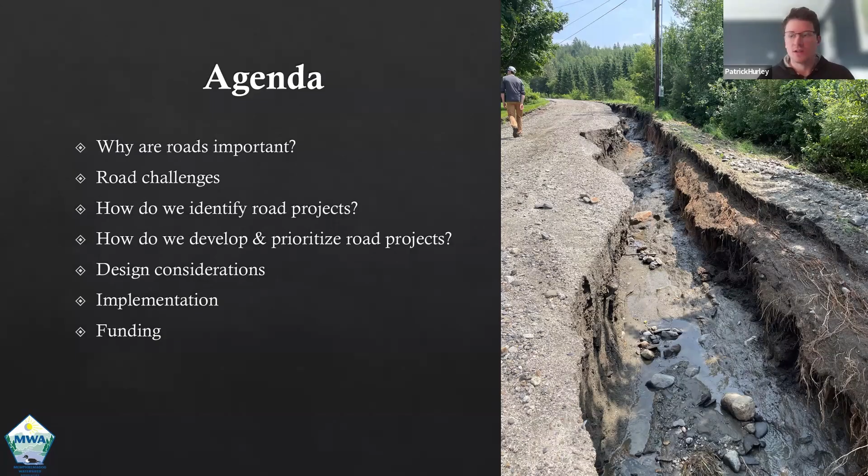We're going to discuss how we've traditionally developed and prioritized road projects one over another, and some of the co-benefits or reasons why certain projects kind of float to the top as opposed to some that kind of sink to the bottom. We'll talk about some design considerations that we try to keep in mind when we're working to fix some road issues and protect and preserve the lake water quality. We'll show some examples of road implementation projects that we've done, and then we can discuss some of the emerging funding opportunities in the state of Vermont for addressing problematic roads and trying to get improvements implemented on the ground.

You all know why we love roads, right? We need access to our houses, we need access to our camps, our properties. It's critical for emergency access. When roads wash out and people are isolated from emergency services, that's a big problem. We also love to recreate, as much as many of us love to get as far away from society as possible when we enjoy our leisure, whether we're boating or hiking around. It's pretty hard to get to our favorite spots without roads.

We also definitely need them to maintain connectivity in our communities, with our businesses, our economy, and roads are the lifeline of our economic success. Without transportation and road networks, we really wouldn't be able to do anything. So while we have road networks that may not be as compatible with ecological needs as we'd like to see, we can't really do without them. So we got to work with them, right? So that's why we're all here. And we prioritize this work because of how important it is for those kind of critical values of our society that we just went over.

And it can be a challenge to work in road settings around waterways, streams, lake shores, wetlands. But we're really committed to doing it because there's so many benefits that come from having functional road networks that are not exacerbating our water quality stressors or our habitat stressors.

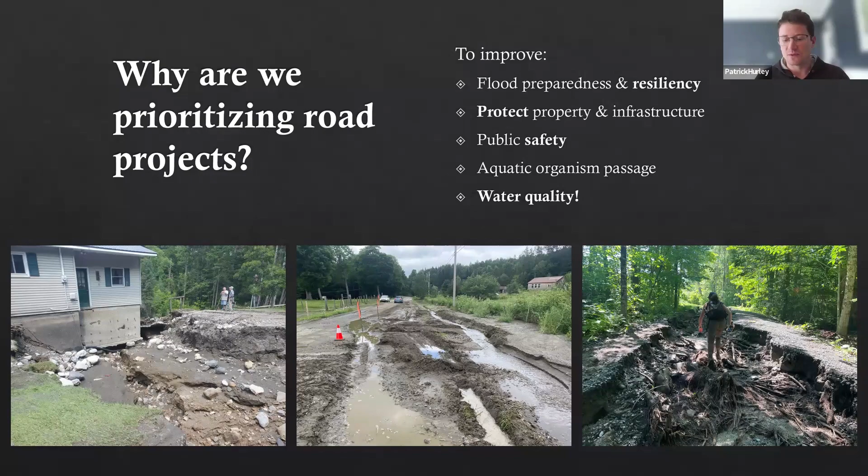And then one of the major things that we try to address is just how costly road disasters can be. Some of these photos are from Morgan, Vermont, that really took a brutal hit in the last couple summers from our floods. And for instance, Toad Pond Road, we lost about a mile of that road. And you can see here, it washed away all the way down to bedrock. We lost probably 40 culverts on that road because they all clogged up with material.

And then the water coming down from the mountain couldn't pass through the road culvert, so then it jumped down the ditch. And then it runs down the ditch for about a mile and it takes everything out with it. So this is costing the town upwards of $700,000 to repair, and it will be way more than $1 million to upgrade in terms of improving the flood resiliency.

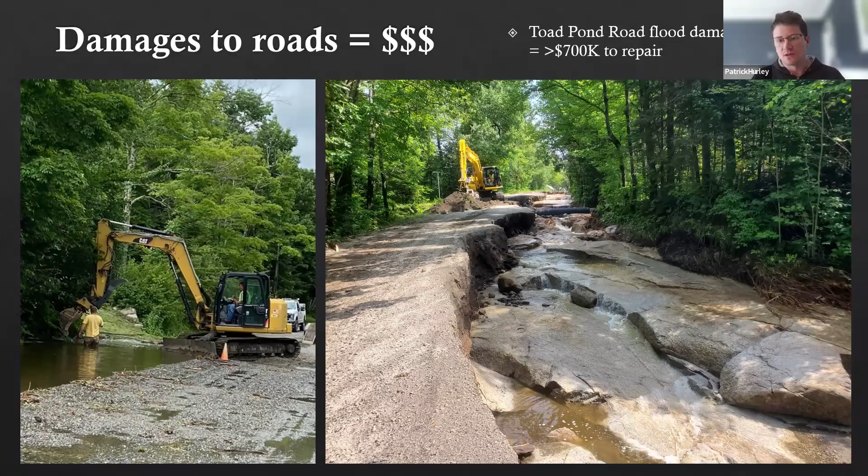And these are small communities. Morgan has less than 1,000 taxpayers in its community. And so being able to support those improvements on a limited tax base is a big challenge. And so having some clean water dollars and other funding sources that can help get us to the finish line on some of these improvement projects is really important.

As I like to say, the proof is in the pudding. This is from our Echo Seymour Lake Watershed Action Plan. So for those of you who aren't familiar, we have worked with DEC and lake associations and our partners at the conservation districts, both Orleans and Essex County, to do these watershed assessments that look at road networks, stream networks, lake shores, and we often extend our work to agricultural parcels and working forest lands to try to identify opportunities to improve water quality or protect water quality, improve habitat.

And then one of our objectives is to kind of break down what sector the excess phosphorus loading that makes its way into these target lakes, where is that coming from? Is it coming from the farms? Is it coming from the streams? Is it coming from the road networks or wetlands or lakeshore projects or forestry projects?

And so we have an ability to use DEC tools like the interim phosphorus calculator, which helps us determine, okay, if this project, if this gully, for instance, is washing away at this rate, what can we estimate the phosphorus loading from this singular water quality issue? How much phosphorus is this generating?

Or for instance, a road network, if it's not performing as it should, if it doesn't have the best management practices that it should, what is the phosphorus loading, the contribution from that road to the overall phosphorus budget? So by estimating the excess loading from all of these different projects that we identify on the ground, we can kind of parse out, okay, of the total excess load getting to Echo and Seymour Lake, 102 kilograms, for instance, per year are coming from the roads versus only 13 from wetlands and 9 from agriculture and 40 from floodplains. And so in this instance, the road networks were a major source, the primary source of excess phosphorus loading.

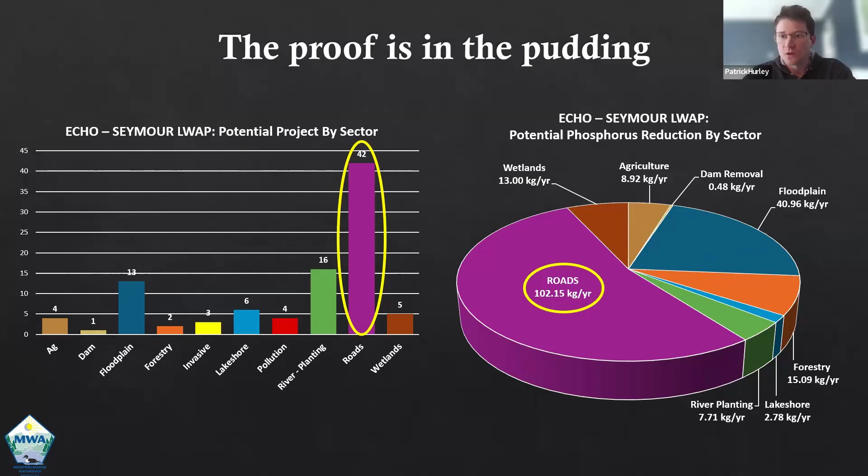Now, this is a very coarse approach, right? This is not an analytical or an empirical study. We're not doing a total maximum daily load analysis or anything like that, but it allows us to compare apples to apples, or apples to oranges, right? And so there's a common denominator. What's the phosphorus loading? And so in Echo and Seymour, it was a lot of road problems. And a lot of it because the roads are old and steep and they're on really heavy soils and they wash away regularly. So that was a big takeaway. It's like we need to work on our roads, both public and private.

But in the forest sector, there was actually tons and tons of trails, right? Skid trails and logging roads. And so those might be classified as a different sector, but really at the heart of the matter is the same problem. It's a dirt road. It's a gravel road. And so that's a targeted area that might mislead one into thinking it's strictly the cutting of the trees that is an issue, but ultimately it's actually the access routes into the forest harvest areas that can pose a problem. Do we have a question, Patrick, Deborah?

There's a question in the chat. How did you quantify the sectors and how could you parse the data into sectors? Sure. So we refer to them as work sectors, and the state has kind of differentiated the work sectors. So if we identify a water quality issue on the landscape, we try to boil it down to, is this an inadequate riparian buffer? Is it a stormwater management issue? Is it a loss of wetlands issue? Is the stream and the floodplain out of sync? Are they disconnected? Are they eroding? Are the stream banks falling in? Is it a road crossing or a road erosion or a road ditch problem, or is it a forest trail and road problem? And so when we're identifying these problems or opportunities on the landscape, we have to essentially classify them into one of those bins.

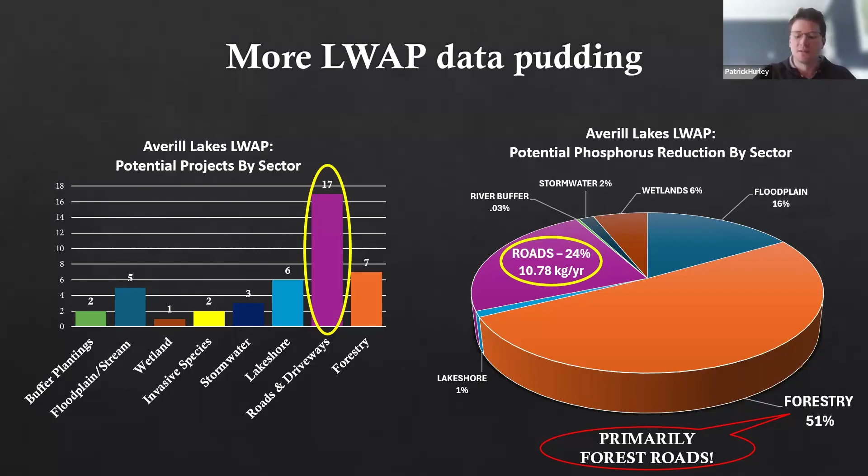There's a lot of challenges with road projects, right? So some of it dates all the way back to the settlement period. A lot of these roads were not built to be roads. They were horse logging trails. They were goat paths. They were a skid trail for collecting ice harvest in the wintertime. They might be a sugaring trail.

And then they were built, improved to become a cart path. And then they were improved to be a one-lane road once the Model T got around. And now it's expected to pass two semi-tractor trailers going 50 miles an hour right by each other. That's a serious reality that we need to consider. A lot of these roads were not sited. They were just built. They were not designed. They were just built. And it's been Band-Aid after Band-Aid after Band-Aid for 100 or 200 years.

So it's a big realization that some roads are rotten to the core because they weren't built properly or they weren't built ideally. And that's a really expensive challenge to fix. We don't like talking about eminent domain in our country, but oftentimes we do consider, should this road just be moved? And it's rarely ever done because it's not feasible or cost effective. But there are opportunities where that should be explored because sometimes roads are just in the wrong place.

Roads bisect or run tangent to virtually every regulatory jurisdiction you can imagine. Historic resources, archaeological resources, wetlands, streams, lake shores, utilities, steep slopes, confined areas, alluvial fans. There's often challenges with, as I mentioned, the road construction. Is the road crowned like it should be, or is it a sunken road because over 100 years all the materials washed away, or they cut through a hillside and they didn't do a cut slope, fill slope kind of construction. They just trenched right through it.

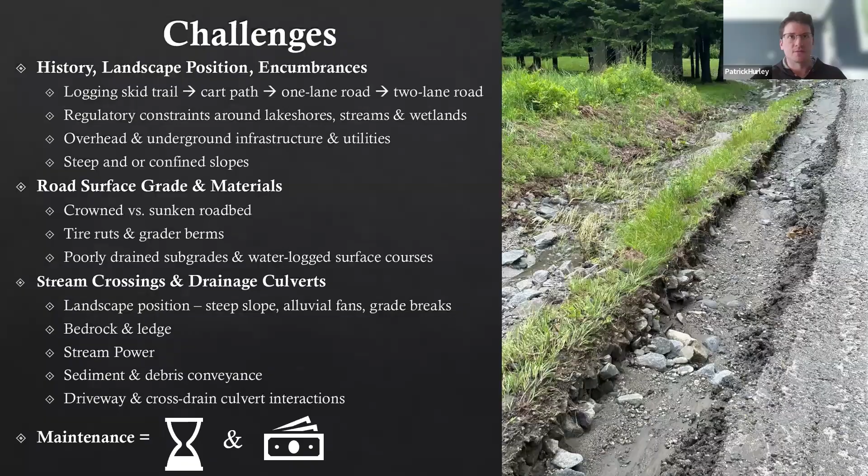So I'm just going to show you some carnage, some pictures that get everybody thinking a little bit. This is just a driveway in Morgan, and what happened here was not a problem with the road. What happened here was the stream coming down from the mountain decided it didn't have enough space for this flood, and it jumped its bank and it came screaming down through this private property, and it took out a private road. Actually, this is a public road, I should say. It really serves only two private residences. But you can just see what it did. That's a 5-foot gully right through this yard.

And just notice that on either side of the pictures, the grassed yards look almost unscathed. Just a little bit of vegetation and root matter really makes a difference between those unconsolidated roadbed materials washing away, right? And so where we can anticipate washouts on roads or vulnerabilities, we try to address them. But this one was almost completely unexpected because it wasn't even crossing a stream. This is 300 feet from a stream, and the stream just kind of went squirrely in the middle of a flood event.

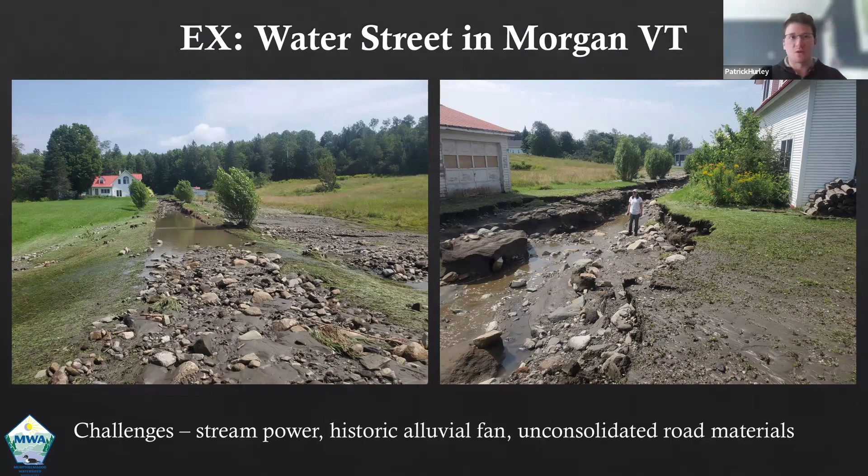Another shot from Morgan. This is because of an undersized culvert, or the culvert got clogged. It jumps the road. Not only is it bringing debris with it during the flood, but it's then creating more by washing out the road. And you got to wonder where all this material goes. It goes right down to the lake. That first picture I showed you on the cover slide, that's from the Seymour Fishing Access area in Morgan. I think I owe Dennis Fortin a shout out for taking that photo.

That's a giant delta sandbar that formed immediately after the floods, and you can bet that 90% of that material is roadbed material, and it all came down from our road network in town. And the state spent several $100,000 dredging out that access area. And if we don't improve our structures and improve our road networks, we're going to have to do that again if we plan to continue using that boat ramp.

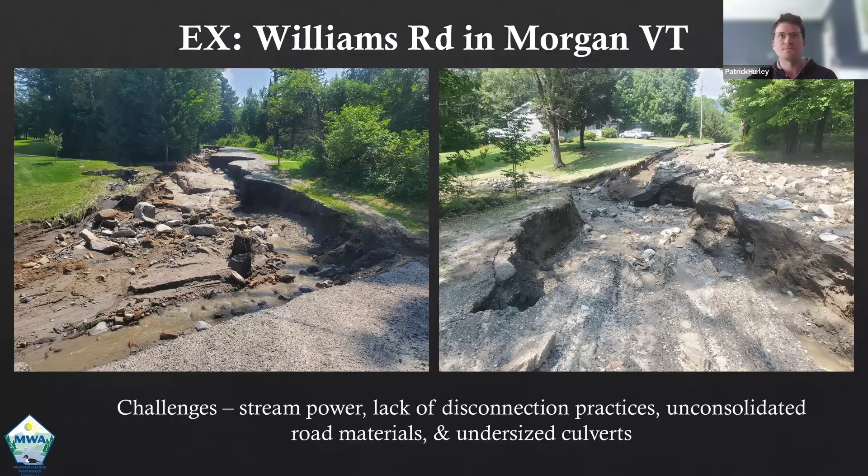Just another couple of pictures of what an undersized culvert can lead to. Not only can it get clogged because of debris like sticks, wood, boulders and whatnot, but stream crossings and culverts, you got to think of them as a plumbing issue. If you put a reducer on a pipe, like you stick your thumb on the end of a garden hose, it's constricting the flow. It's going to accelerate the velocity of the water coming out the other end. It's going to pressurize it. That is erosive power, that's elevated erosion potential.

When we put an undersized pipe in a stream crossing, it's functionally making a reducer and it's creating erosive power on the other side. So what we try to do in our projects is upsize those structures so that they can pass large floods without having those detrimental impacts.

And then there's the less dramatic issues with roads, which is just driveways and ditches where we see them getting overwhelmed or clogged or the flows are jumping out. We're just losing road material. And where does it go? Pretty much everywhere - in your front yard, in your backyard, down the stream, into the lake. And it's not ideal. It's expensive.

It ruins fish spawning habitat. It impairs water quality. It makes that lovely lakeshore access that you have turn into a quagmire of silt and muck when you'd rather be walking on a nice firm gravel bed. And all of this has compounding effects that really devalue our waters and our road networks and just cost the taxpayer an awful lot of money.

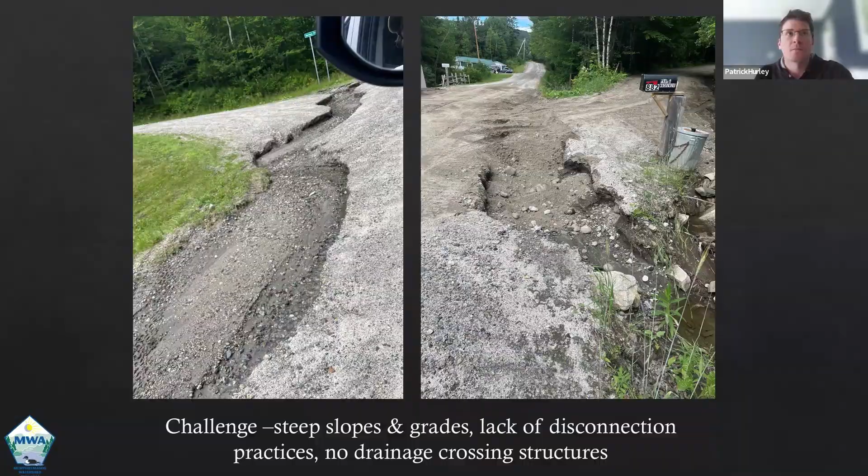Again, culverts - they are often the biggest challenge because they're difficult to maintain. You don't think about your culvert until there's a problem, and oftentimes they get buried so quickly that you don't even know where it is anymore. So improving these, whether it's a driveway culvert or a public road culvert or a stream crossing on a major road, really is some of the lowest hanging fruit that we start with our assessments and continue developing projects around these stream crossings because they are really the bottleneck.

And then once it gets down a lake, you have large gravel bars, these debris flows, and oftentimes they revegetate on their own and they can provide new habitat in ways that you might not suspect. But these are also incredibly vulnerable to invasive species infestations.

When you have bare substrate like this after a flood, and that flood carried knotweed or Phragmites downstream, whether it's roots or seeds or plant stalks, this is wildfire for them. They love bare earth, they love no competition. If they can get a foothold in this new gravel bar or in this new silt pocket, they will take advantage of it faster than anything else.

So we've been really sounding the alarm to our lake associations: where you see these deltas forming, where you see these new gravel bars at the mouth of your lake, keep an eye on them. If you start seeing Phragmites or knotweed pop up, go after it hard and heavy. Take it out right away. Don't let it get a hold, because the longer you wait, the more impossible it is to eradicate, and they love to spread and creep.

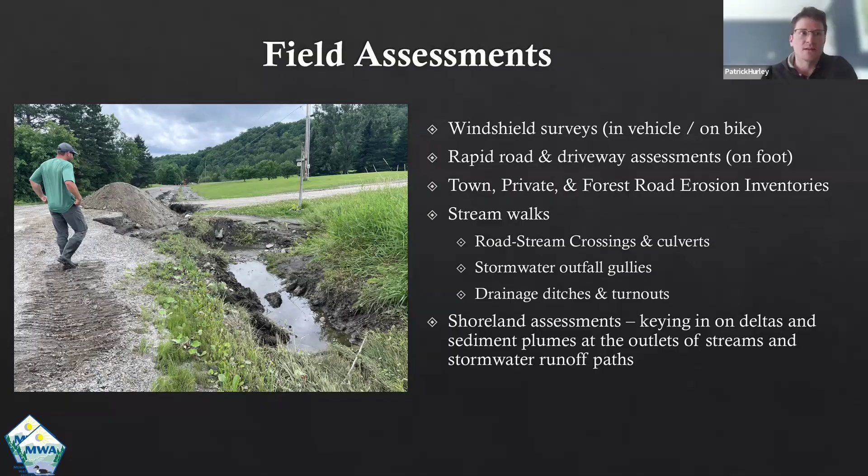I'm going to take a sip of water. Talking a lot.

So there's a lot of information out there, as I mentioned. One thing still under development is how to deal with private roads. Town roads throughout the state, and state routes as well, have an established protocol they've been doing for decades. For town roads, it's the municipal road general permit.

There's funding through the Better Roads programs. This essentially establishes standards, evaluates whether those standards are being met, and provides funding and technical assistance for towns trying to get into compliance with their roads.

There's lots of trainings like the Rivers and Roads Network or Rivers and Roads courses that try to educate and train, and get feedback from road foremen and road commissioners as to what the best practices are, what is feasible, and how to deal with really challenging, problematic sites, say where there's shallow bedrock or really nowhere to put water. So there's a lot of resources out for town roads.

I suspect this crowd is probably more interested in private roads, road associations, and driveways, which are really challenging. There are no explicit standards, but when we do work on private and shared roads, we do try to adhere to the MRGP standards, the state standards that VTrans has helped develop. That sometimes works great.

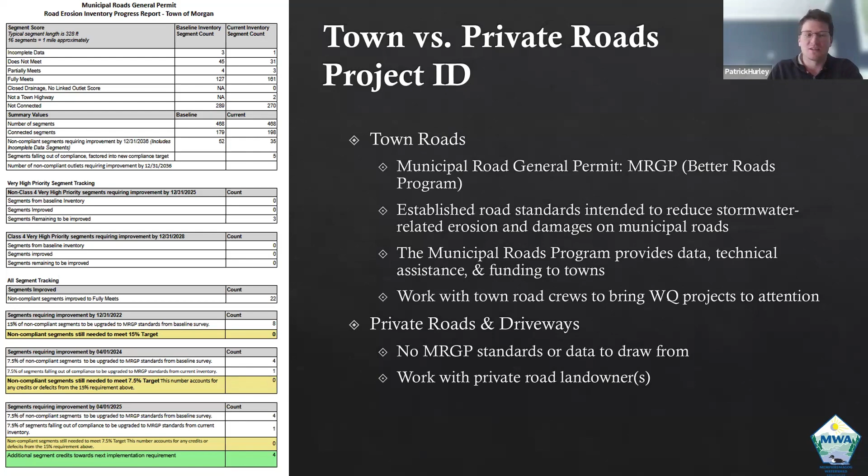One really challenging example is over in Averill Lakes, where we've got a huge road network owned by the timber company with a state access easement for the public over the road, but really the association and private landowners maintain the road. You've got to make sure whatever you're proposing jives with all these different entities, which all have different interests. It can be a real chore and a real conundrum to figure out how to move forward.

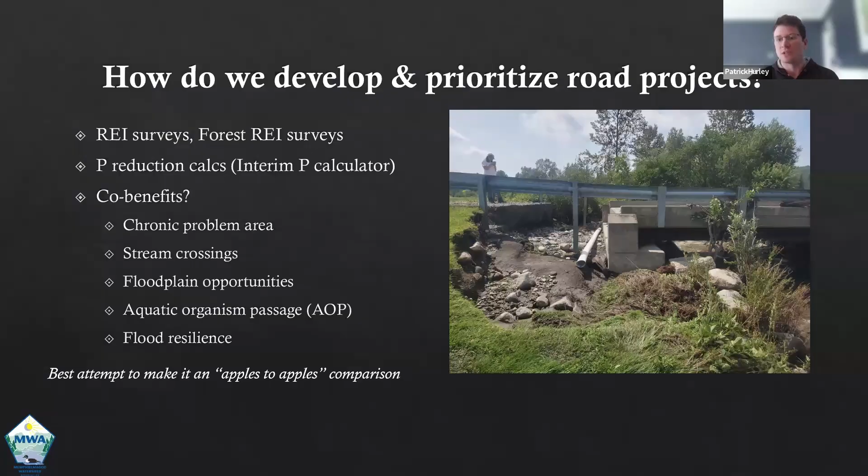In general, if it's a flood risk or flood resiliency project, we're going to try to give that an extra bonus point, because ultimately we have to balance the realities that this is not just a phosphorus bean-counting exercise - there's human and societal elements that need to be considered too. How many people does this road serve? Is it just serving one camp at the end of a dirt road, or is it a primary artery for 200 camps? That's a really important consideration, especially when there's limited funding.

In terms of design considerations, we've mentioned a lot of them today. Who owns it? Who maintains it? Who's got an easement? Who's the foreman? Who's the commissioner? You definitely want to understand all of these things. If it's a town road, you want to be able to talk to your VTrans district to make sure that what you're seeing is also what they're seeing, and that your suggested opportunities for improvement jive with their best practices. Maybe you can leverage better roads programs or VTrans structure grants as match funding, or maybe they can provide technical expertise.

As we mentioned already, there's all sorts of constraints: natural resources, archaeology, utilities, bedrock. One thing a lot of people don't think enough about are the plow trucks. How are the plow trucks going to ruin your project? And it's not the plow driver's fault - it's just the fact that plows are huge, they've got a lot of power, they throw a lot of dirt, they throw a lot of snow.

If you have a beautiful stone-lined ditch one fall, come back in the spring and it looks god-awful because it's all filled in with sediment and gravel - guess what, it's working, it's doing its job. But there are places where snow needs to be put, places where turnarounds need to be accessible for a plow truck. Culverts, transitions, driveways - all of that needs to be able to pass plow trucks and emergency service vehicles. We've talked about, while you're going through design, looking for other opportunities that are off the road.

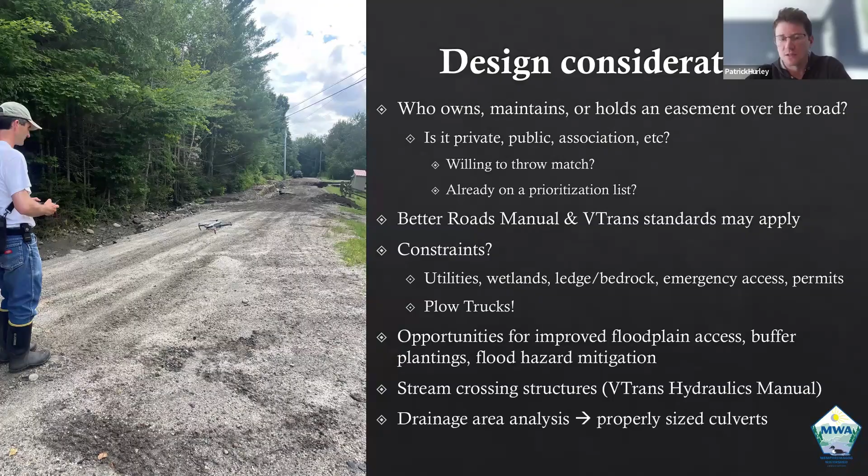And then when we're doing a really thorough design or analysis, we start doing some actual spatial analysis and hydraulics to figure out, are these crossings properly sized? So we will often take an entire road network. So we're not working on just a 100-meter segment like the state of Vermont typically encourages.

We're looking at the entire road network from start to finish, and we will inventory every single culvert, every single crossing structure, get its diameter, often try to get its slope. Is the slope of that drain matching the slope of the stream that it's draining? When we inventory all those structures, we can then perform an analysis. It's called a drainage analysis.

You can calculate the contributing drainage area to each one of those structures. Not only are you getting the acres that drain to this structure, you're also getting the predominant flow paths. That helps you identify, is this structure in the right place primarily, and then is it big enough?

So we can take that existing size, take our drainage area, do a rainfall runoff calculation, whether it's a 10-year, 25, 50-year flood. We usually shoot for 100-year flood. In our area, we've kind of narrowed that down to like a 2.5 inch per hour rainstorm. We got 8 inches of rain in 3.5 hours in Morgan 2 summers ago. That was a 1,000-year flood.

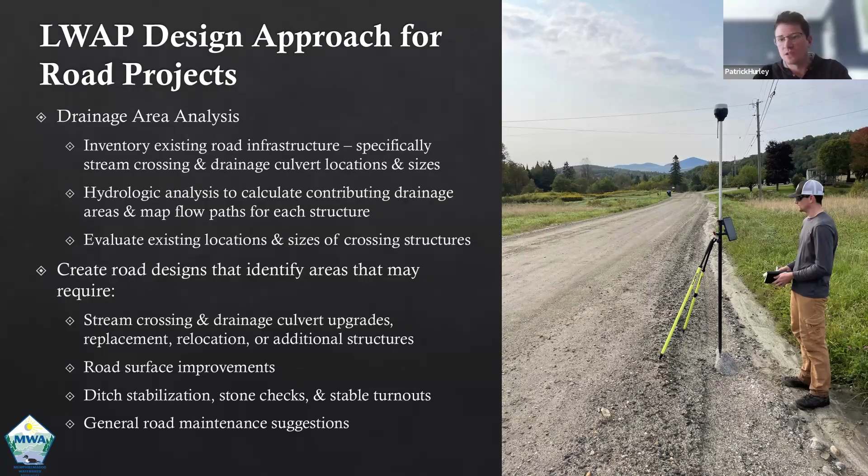So we're like, okay, let's do a 2 to 2.5 inch per hour rainstorm. That's more close to a 100-year flood. We design these really above and beyond size structures so that they can convey the 100-year flood. And we provide design plans for these entities, whether it's the town or lake association, that says, okay, here's a plan that shows your whole drainage analysis and all your drain network.

In this image, you're seeing all these green dots. Those are all the structures that we inventoried along Toad Pond Road. These are all the flow paths coming off of this mountainside. We can tell you how inadequate the current structure is. This is an 18-inch structure and it should really be a 24-inch structure, a 30-inch, or a 36-inch structure. We can tell you that.

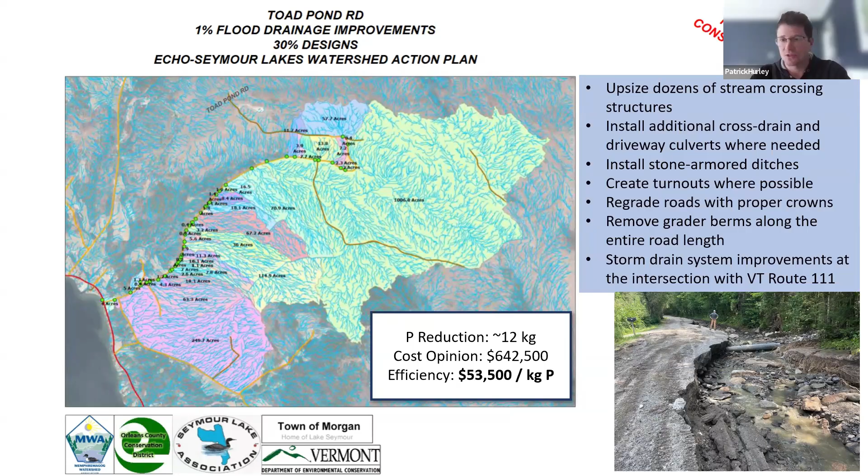Whether or not you have to put in a 30-inch structure is up to the town. It's up to the budget. It's up to whether or not there's enough soil cover to drive over it or soil depth for bedrock to install the pipe. So this provides these partners with a roadmap, which is a fun way of putting it, to figure out where are our biggest priorities.

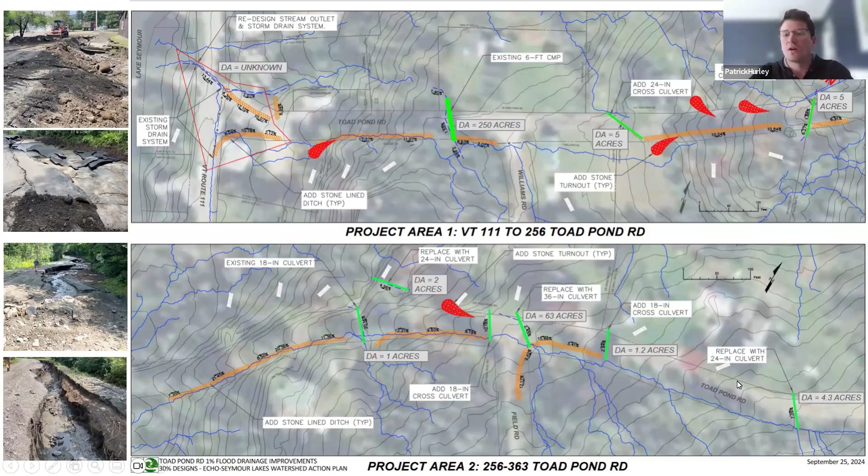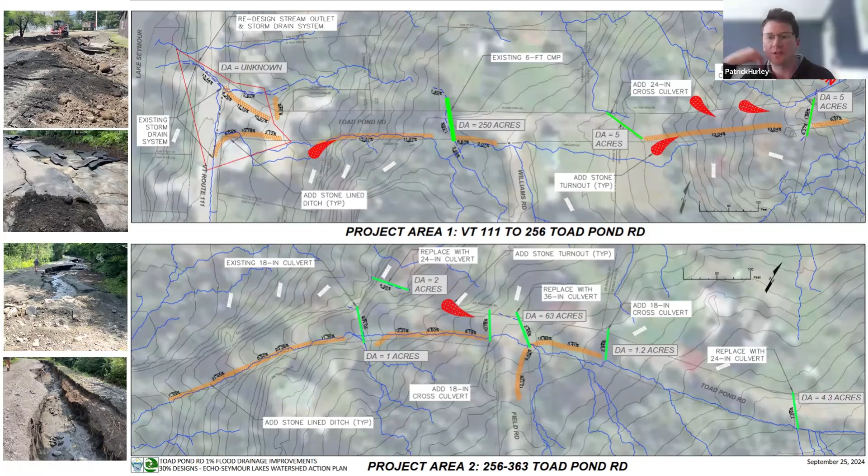So where we see places like replaced with a 36-inch culvert, it might be inventoried as a 24, 36, or we'll say a 30-inch. It's got a 30-inch, but we suggest a 36-inch. That might not be the most important pipe to start with. Where in other places, if you got an 18-inch and we're saying it needs to be a 36-inch, that's your high priority culvert. And you can take that into consideration.

There's other things that we put on these plans, like this ditch is steep enough that it should have stone lining, or this ditch is steep enough that it should have stone check dams, or there should be some turnouts along this road because you don't need a ditch here. You just need to make sure the water gets off the road. And here are some locations where you can physically do that based on elevations and space. This often requires working outside the right of way.

And so you might have to get landowner permission to then extend your turnout just a little bit further from the right of way so that there's enough drainage. So we've provided these for a lot of different roads, both Toad Pond Road in Morgan, West Echo Lake Road, and East Echo Lake Road in Charleston, Jackson Road, and Dana Moore Road in Averill Lakes.

And while they're really high price tag projects because of how many structures and how much road work we've identified could be improved, it can be done in piecemeal. It doesn't have to be done in one fell swoop. You can take all this information and target the most undersized or the most inadequate or the steepest areas. You can kind of work through it in a progression and not necessarily have to take out a $1 million loan through the town to get it all done in one fell swoop.

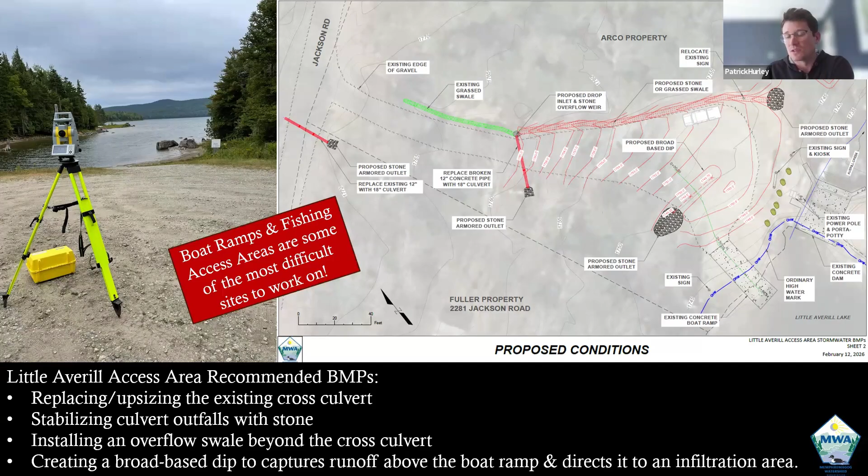Are we doing okay on time, Deborah? Yeah, we're at almost 12:45, and can you take a quick question?

Yeah, sure. And from Josh, in terms of working outside of the right of way, are these formal or informal agreements? What about long-term maintenance of work done outside of the right of way? Yeah, that's a really good question, Josh. With landowners, oftentimes it's, well, it depends. If it's a grant, then there's a formal agreement, and depending on the grant, there might be an access or an operation and maintenance obligation on behalf of the grantor. If it's more of an informal project, it can be a handshake deal. So it all really very much depends. I don't think the town is going to sign on to managing or maintaining things outside their right of way because that sets a precedent that is difficult to follow and extend everywhere else.

And there was another part of your question. What was that? What about long-term maintenance of work done outside of the right of way? Yeah. I think typically we have to come up with some sort of expectation. So in some places like Echo Lake at the access area, it's a state property, and they have very minimal funding for maintenance work, right? They can really just kind of mow the lawn.

And so we've worked with Will Marlier at the Conservation District to try to convince this lake association to take on spring cleanup of things like a rain garden or things like a sediment forebay. So sometimes you can get formal, low tech maintenance agreements or understandings set up so that a good project doesn't get neglected in the long run. Okay, thanks. Yep.

So I'm gonna breeze through these last couple slides because we've talked about a lot of them already. So, in terms of implementation, we're doing all sorts of things. We're trying to crown the road so that it has 4% slope going towards the edges from the center line. Removing the berms that get created by plows, by graders, by just tire ruts in the soft, muddy seasons. We're always working on culverts. We're always working on ditches. We're always trying to shed water off the road through various disconnection practices.

One thing that I'd like to see more of is broad-based dips. That's essentially a water bar that's elongated like 100+ feet, and so you could still pass like a low boy semi truck without bottoming out. And it's not a water bar that's just going to get obliterated by a snow plow. It's a much more gradual dip, and the Forest Service uses them a lot on logging roads in the West.

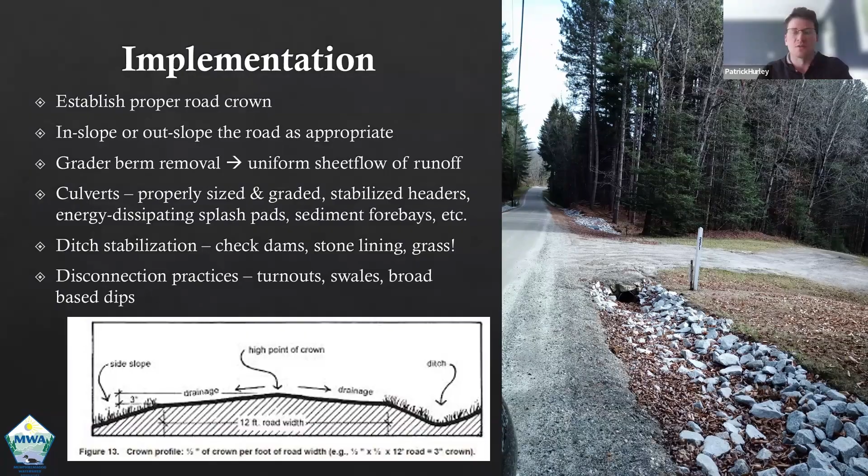There's tons of typical details available from the state resources just to show you that you don't have to go back to the drawing board for many of these practices. You can hand this to a contractor who knows what they're doing and say, we need you to do this along this stretch of the road. And they understand. They're going to get it. It doesn't need to be reinvented.

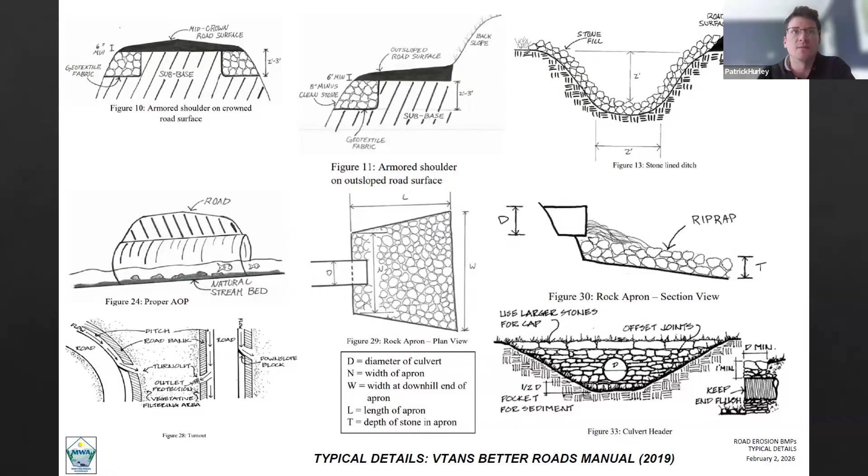This is a couple pictures of some culverts getting installed in Morgan, a driveway. We worked with the conservation district from Orleans County. This landowner gave up their entire driveway. They said, this is a problem for us. It always dumps water into our house. What can you do? So this is a three-tiered infiltration practice that was planted. It's a perennial garden with a porous under or subgrade. Water coming off the road actually percolates through those planting beds and into the ground. And it's been a really great project. It's been a good success.